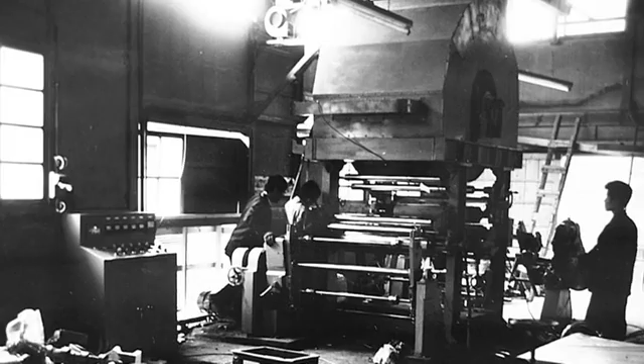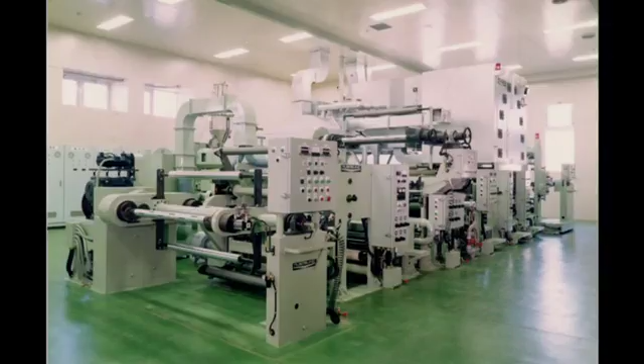Musashino Kikai Company Limited forms the core of the Unicom Group located in Tokyo, Japan. Established in 1959, the company began by making cellophane paper manufacturing machines and Japan's first extrusion laminator, and now manufactures cutting-edge functional film production lines, coaters, and laminators.

A lot of functional materials are used in state-of-the-art device equipment. We, at Musashino Kikai, make machines for producing such functional materials.

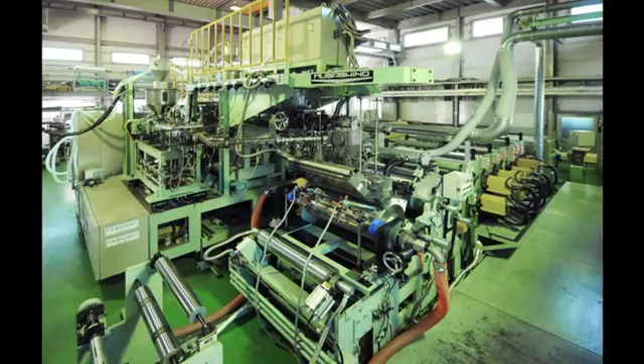Examples of products indispensable in our daily lives made of such materials include LCD televisions, cell phones, electric vehicles, and polarizing films, protective films, printed circuit boards, and electrodes and separator films for lithium-ion batteries used for photovoltaic power generation, as well as encapsulants and backsheets for various industrial products and packaging for food.

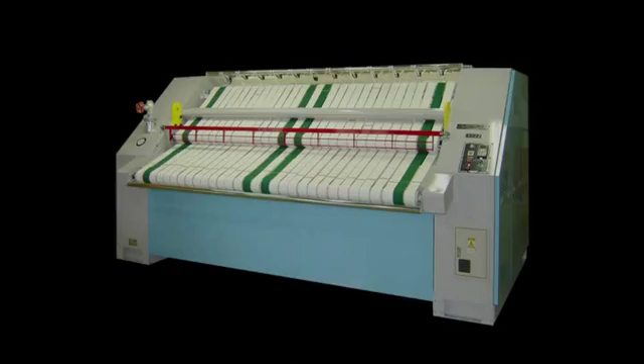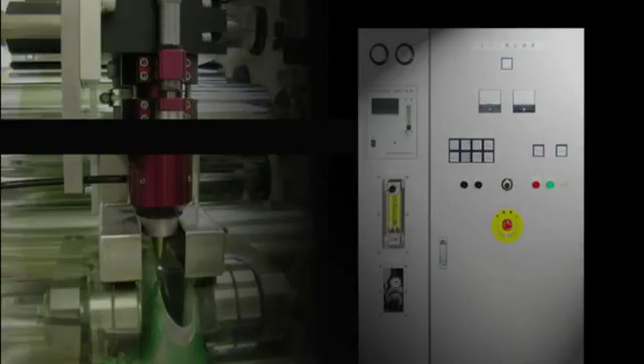Other businesses we are involved in include providing industrial cleaning equipment, textile and hollow fiber membrane manufacturing equipment using nylon and polyester, PSF, laser processors, ozone generators, etc., using a variety of technologies to offer new solutions.

Musashino Kikai has 6 district offices and 3 plants around the country. As a manufacturer of customized machinery, we are striving day and night in an effort to respond quickly to the needs of customers. Our machines are valued highly, not just on the Japanese market, but also by customers all over the world.

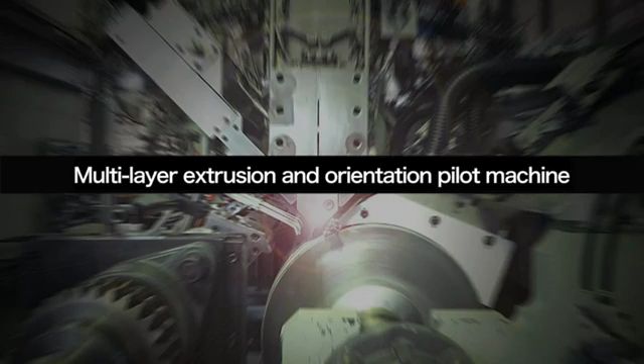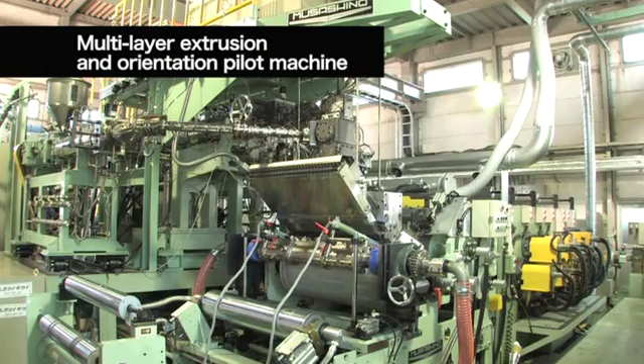Let's take a look now at Musashino Kikai's testing machine, the multi-layer extrusion and orientation pilot machine tester.

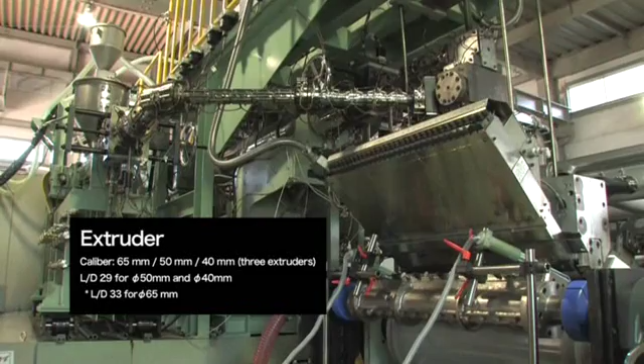This machine can carry out a forming test on up to 3 kinds and 5 layered films or thin sheets. There are 3 extruders of 65mm, 50mm, and 40mm caliber. L by D of the 50 and 40mm caliber extruders is 29, and 33 in the 65mm caliber extruder.

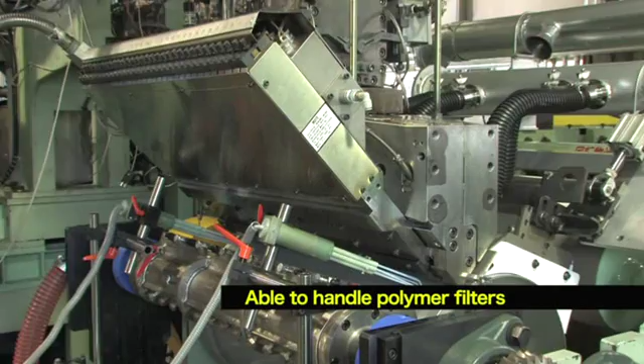We have a range of screws to handle a variety of raw materials. There are 3 kinds of 5-layer feed blocks. The T-die is an 830mm wide contour die made by Extrusion Dies Industries of the US. This is combined with an X-ray thickness gauge and is automatically controlled by heat bolts.

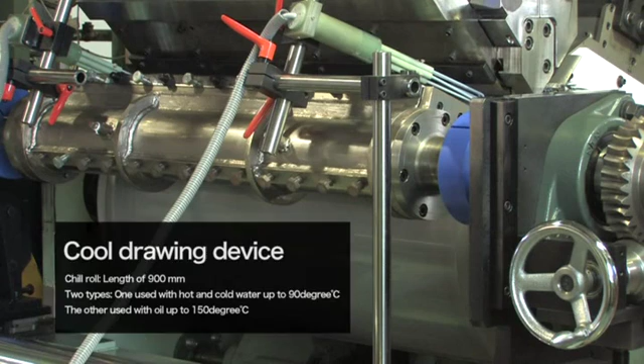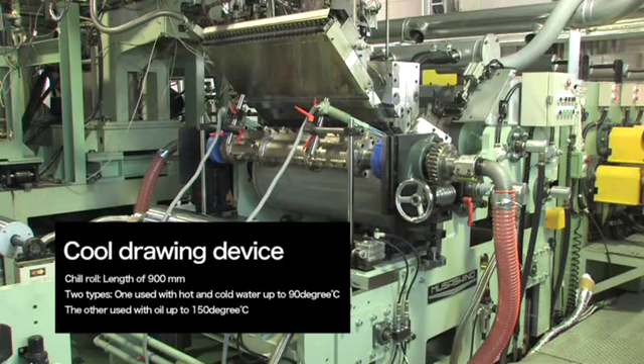This is a cool draw-off device. The chill roll has a length of 900mm and is used with hot and cold water up to 90 degrees centigrade. Or there is another one for use with oil up to a temperature of 150 degrees centigrade.

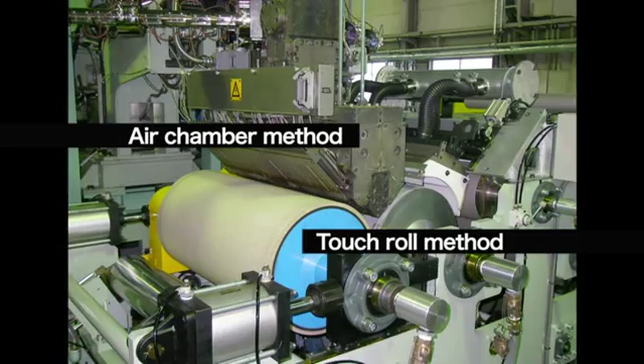The forming method uses a combination of a vacuum chamber and the air knife. Other methods use the air chamber or touch roll instead of an air knife. For the touch rolls, we have rubber rolls, metal rolls, and elastic nickel sleeve rolls, which also have electrostatic pinners attached to them. The maximum machine speed is 200 meters per minute.

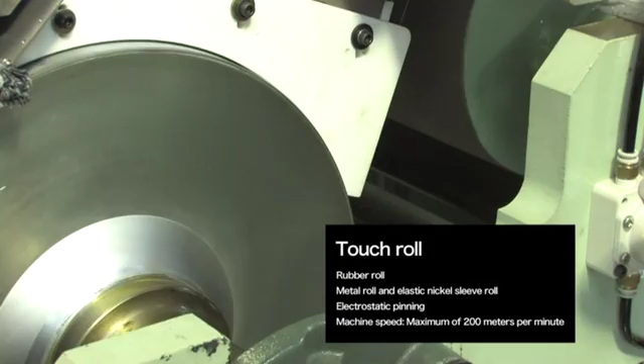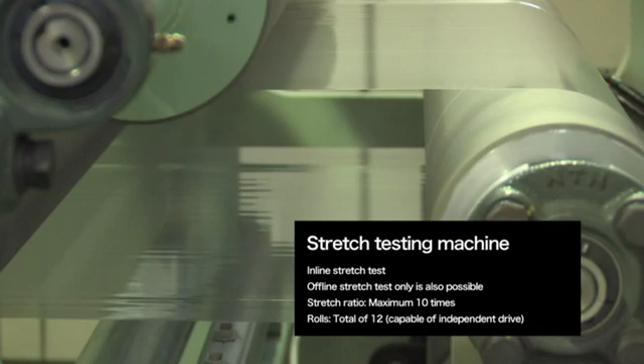The biggest characteristic of our testing machine is that it has a longitudinal stretching device installed on the line. It can be operated with inline stretching and also offline stretching tests. The maximum stretch ratio is 10 times.

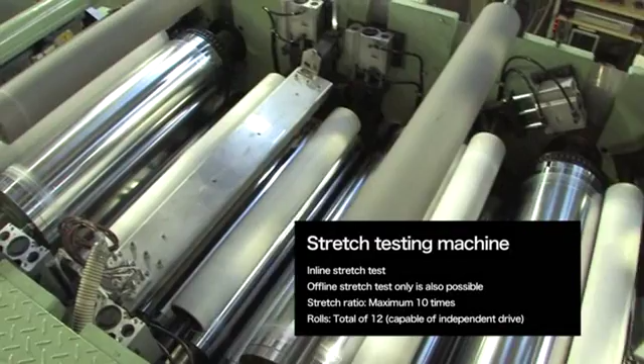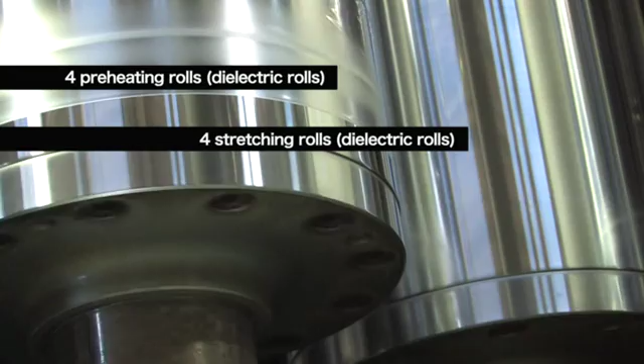There are a total of 12 rolls which drive independently of one another. The first 4 rolls are used for preheating. There are 4 stretching rolls with 2 annealing rolls, which are dielectric rolls that can be heated to 150 degrees.

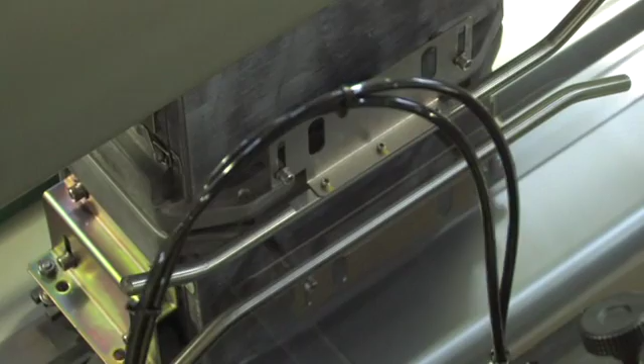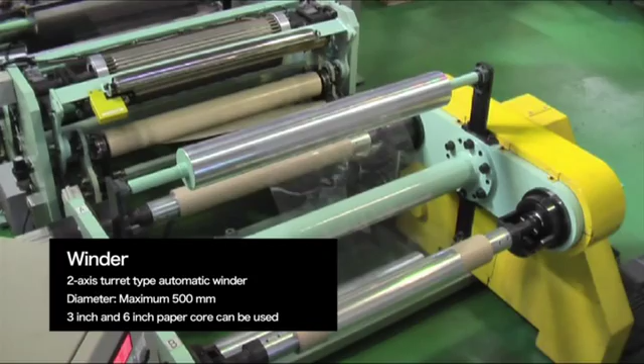Trimming is done by pressing and cutting with a rotary blade. The winder is a 2-axis turret type, automatic winder, maximum winding diameter 500 millimeters, allowing use of 3 inch and 6 inch paper cores.

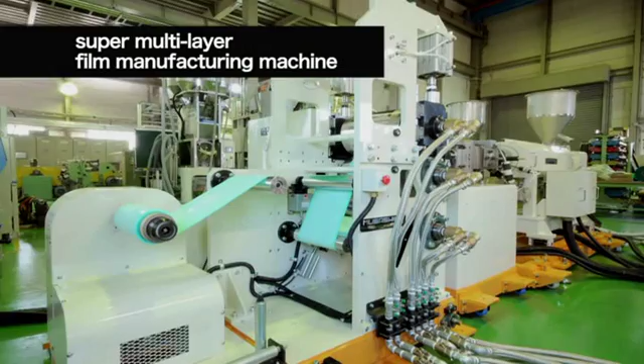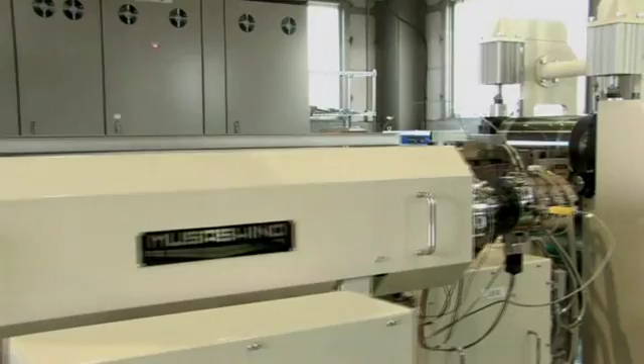Our other testing machine is most probably Japan's one and only super multi-layer film manufacturing machine. It is a machine for testing the manufacturing of 3 kinds and 320 layered films, and it has been installed at the Musashino Kikai Nagoya office. We invite you to take advantage of this machine, which helps develop new functional films.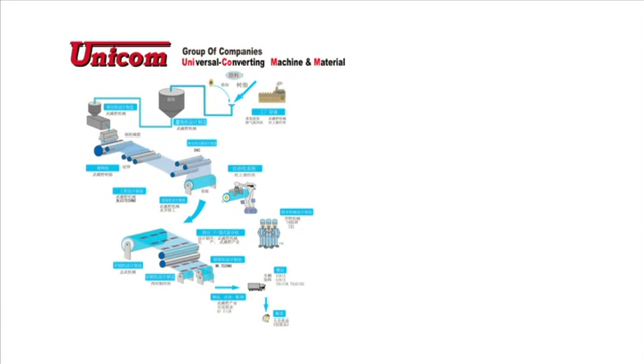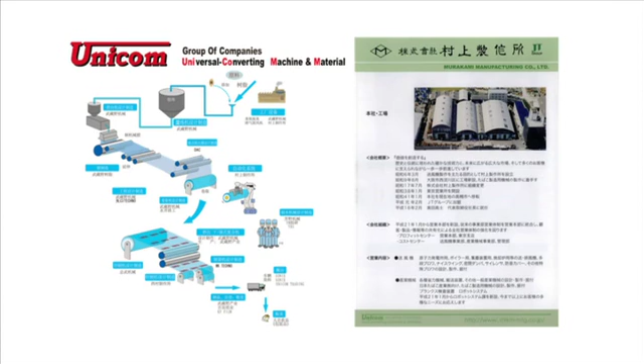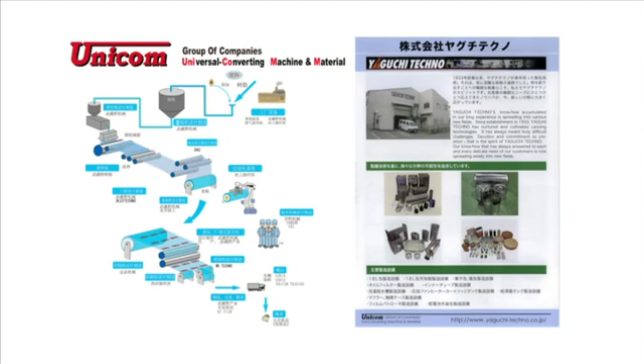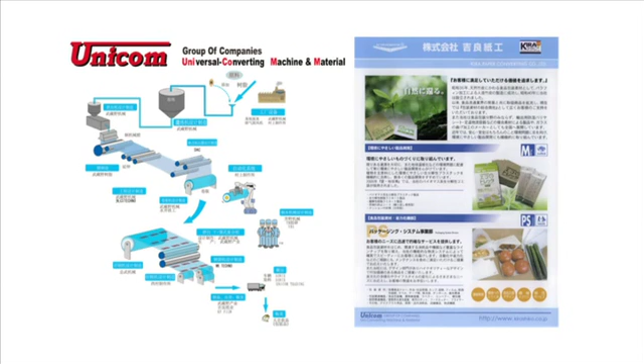The Unicom Group, headed by Musashino Kikai, is made up of 11 machinery corporations and 7 packaging materials corporations in Japan. The Unicom Group provides a comprehensive one-stop service for everything from buying raw materials and ingredients to providing coating machines, laminators, film manufacturing machines and printers, slitters, bag making machines, inspection machines, binding machines, robot equipment, transportation, manufacturing, and selling for packaging materials.

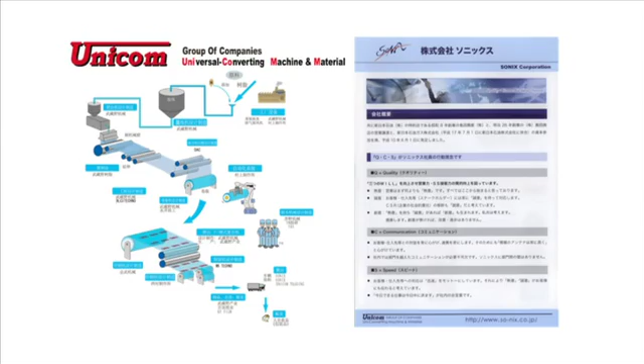We are continuously taking on new technological challenges in an effort to contribute towards society.

Musashino Kikai is a company formed by a group of technical experts challenging the unknown. With MKC's technology as our founding philosophy, our wealth of experience and skills reaching back to our formative years have been passed down through the generations to the present.

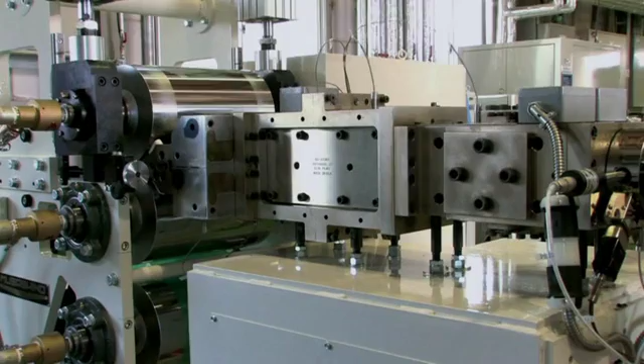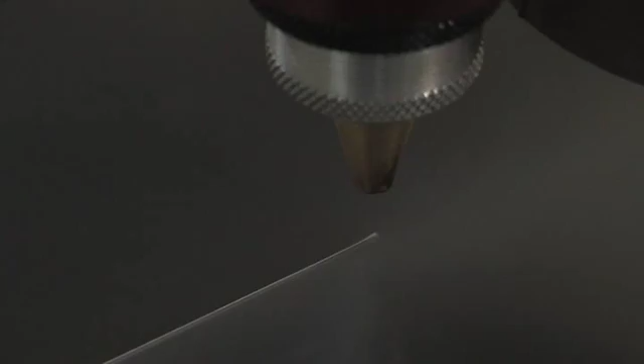We have completed a small test coater and begun a project to install a large multi-purpose test coater so that we can be of greater service to customers in their quest for technological development.

Musashino Kikai is a company formed by a group of technical experts with a tradition of always taking on the challenges of new technology. We thank you very much for your kind attention.